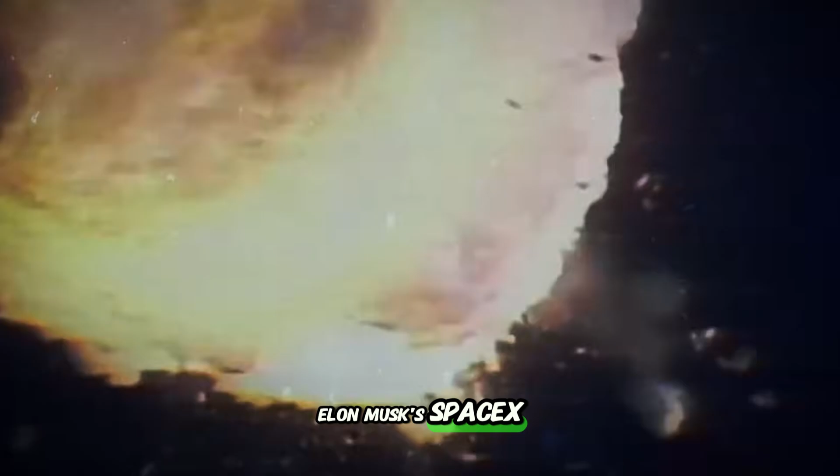What if a rocket engine could launch to orbit, land, and fly again, hundreds of times? Elon Musk's SpaceX Raptor engine is rewriting the rules of spaceflight. Join us to explore this game changer.

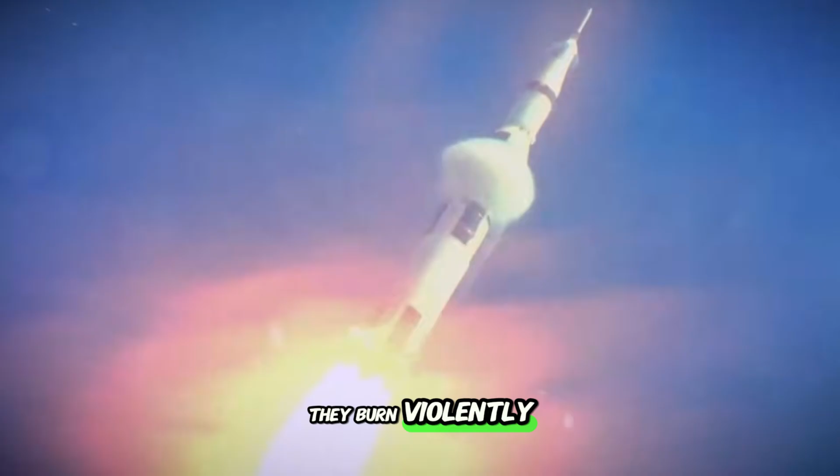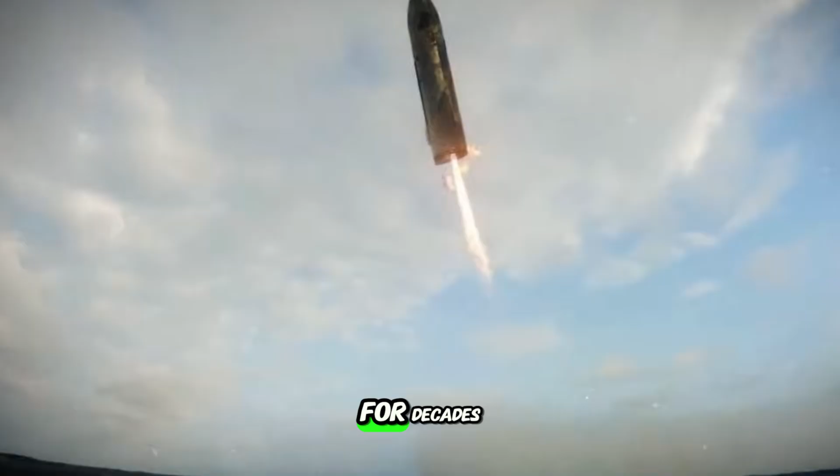Rocket engines have always been a compromise. They burn violently, waste fuel, and often destroy themselves in the process. They are machines that fight against physics tooth and nail, barely holding together long enough to do their job. For decades, this was just accepted as part of spaceflight.

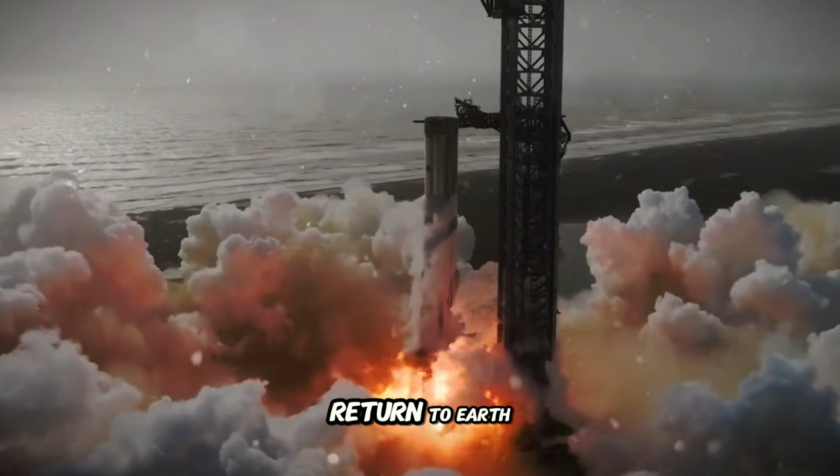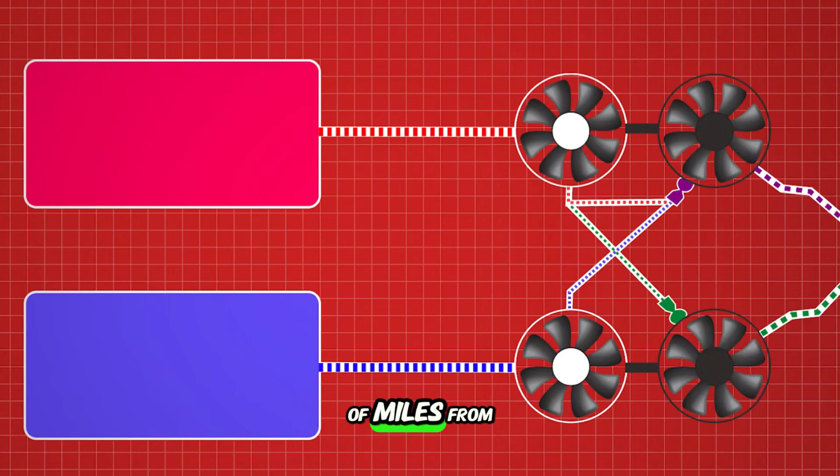But imagine a rocket engine so radically designed, so meticulously optimized, that it can launch a spacecraft to orbit, return to Earth, and do it again and again without ever needing to be repaired. Imagine that same engine powerful enough to carry a ship fully loaded across the millions of miles from Earth to Mars and then bring it back.

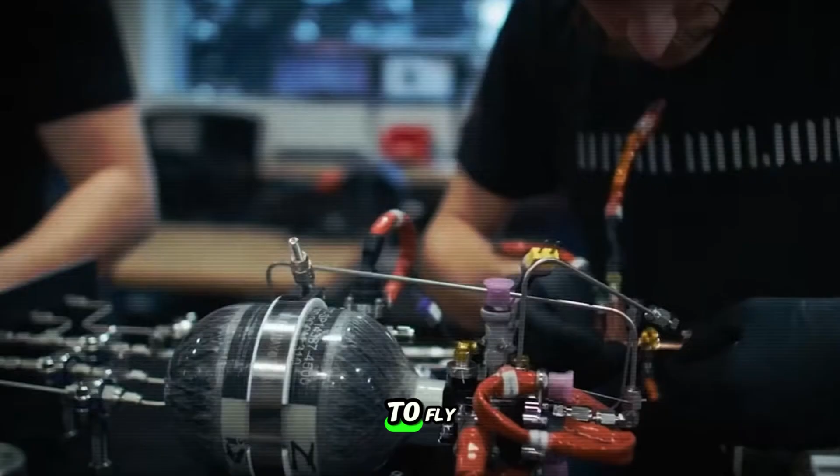That is the SpaceX Raptor engine, a piece of engineering so bold and complex that it once existed only as a theoretical endpoint, a kind of propulsion holy grail. It's the first engine in history to fly using a full-flow staged combustion cycle, a design that squeezes every possible drop of energy from its fuel and oxidizer without letting anything go to waste.

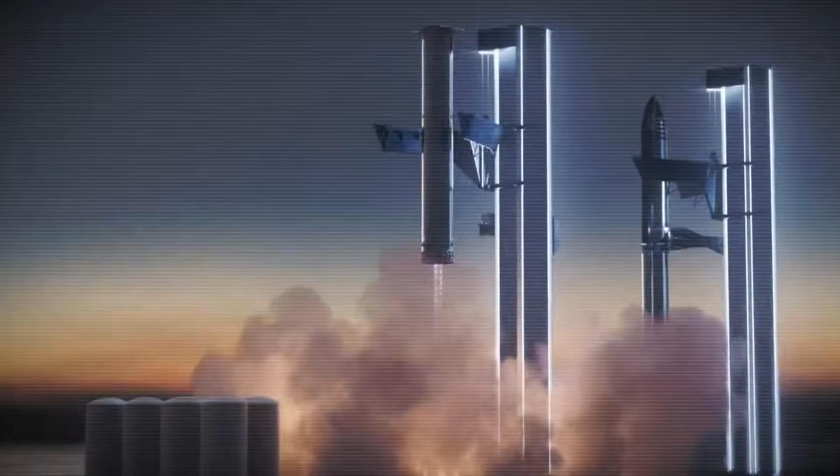For decades, the world's best engineers saw this concept as brilliant but too difficult to build. SpaceX not only built it, they are well on their way toward mass production. Raptor is made for reusability, not retirement. It's designed to take off, land, and launch again with minimal work in between, a complete shift in how we think about access to space.

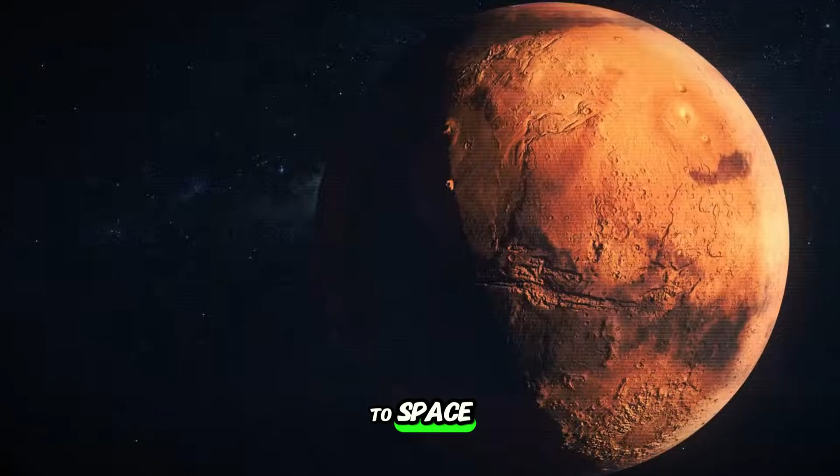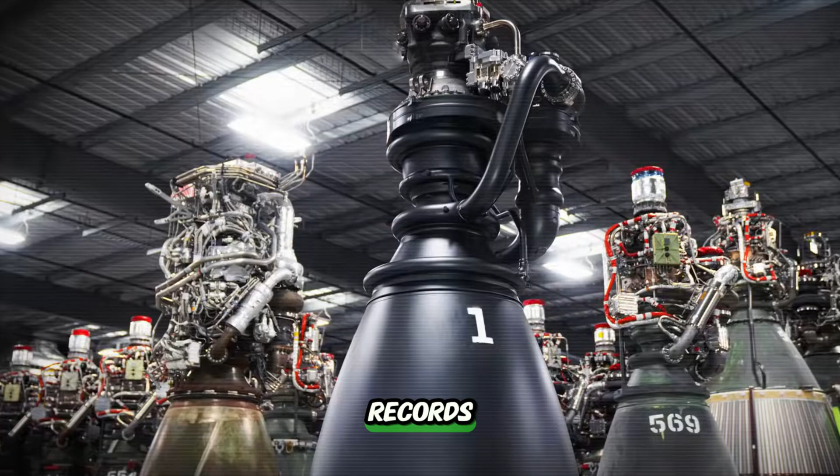And here's the twist. Raptor is methane-fueled, clean-burning, designed with Mars in mind, and tightly aligned with the goal of building a multiplanetary civilization. Stick with us, and you'll soon see why the Raptor engine doesn't just break records, it breaks the whole spaceflight industry.

No revolution begins fully formed. The Raptor engine, with all its radical innovations and record-shattering numbers, started its life as something much more humble, a question. Could there be a better way to build a rocket engine? Not just marginally better, but fundamentally different?

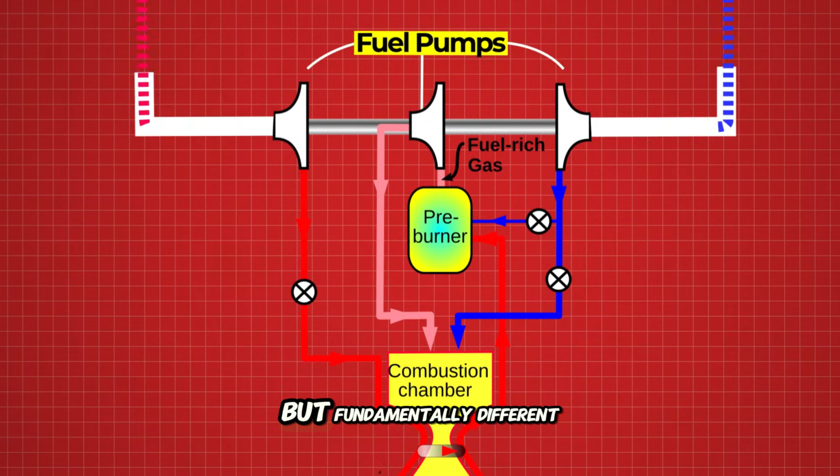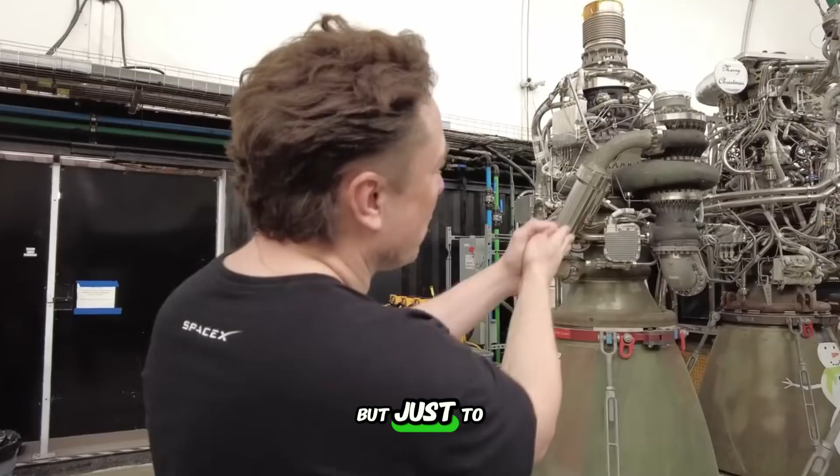That question began taking shape around 2009, when SpaceX started sketching out a high-performance engine concept built around a staged combustion cycle. In traditional rocket engine designs, some fuel is burned not to produce thrust, but just to drive the pumps that push the rest of the propellants into the combustion chamber. That turbine exhaust is then discarded, still loaded with unused energy. It's a little like lighting part of your gas tank on fire just to power your car's engine fan.

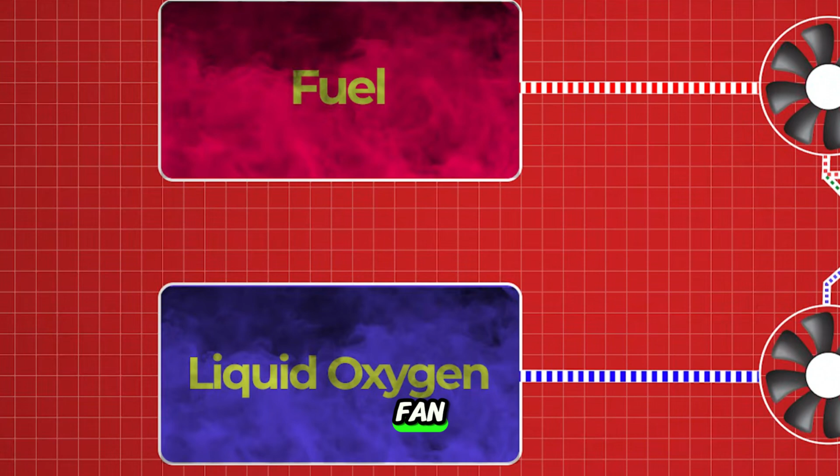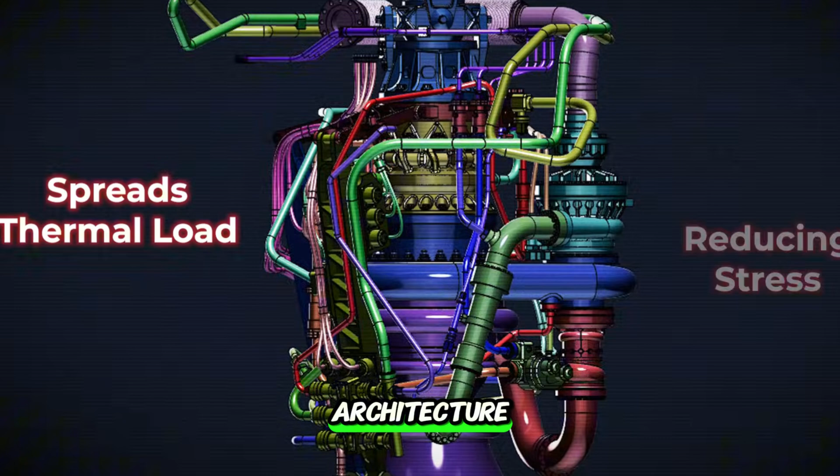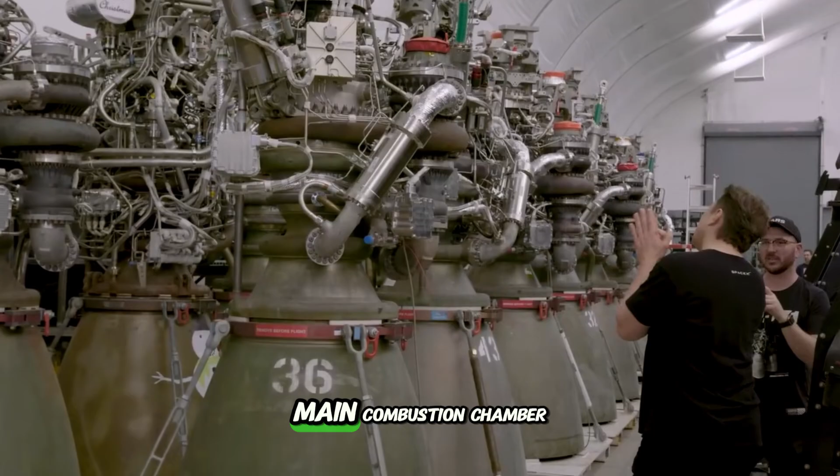The Raptor doesn't do that. It uses what's known as a full-flow staged combustion cycle, a propulsion concept so advanced that, until Raptor, it had never flown. In this architecture, both the fuel and the oxidizer are completely gasified in separate pre-burners. These superheated gases are then sent through turbines that drive the engine's pumps. Instead of being vented away, the gases are routed into the main combustion chamber, where they ignite in a final high-pressure burn.

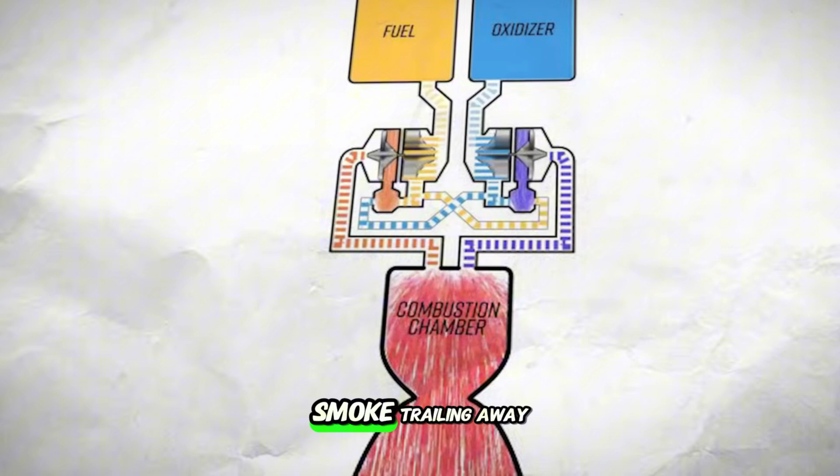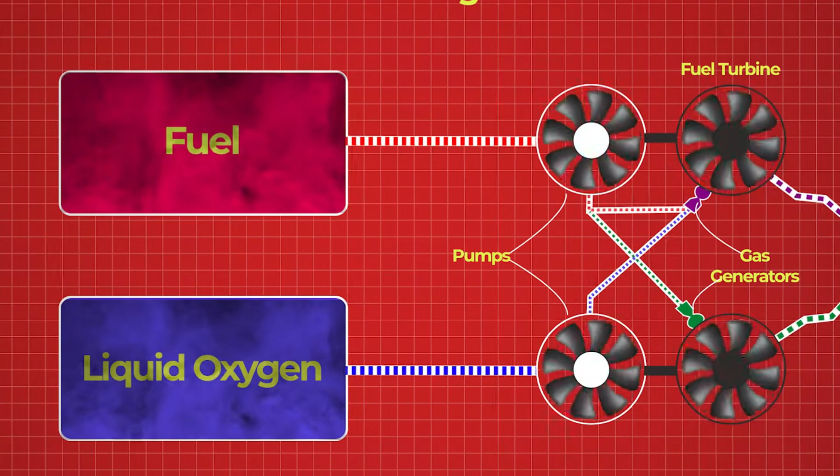Every molecule of propellant contributes to thrust. There's no waste, no dump valves, no fuel-rich smoke trailing away from the rocket. That closed-loop design makes Raptor far more efficient than open-cycle engines. It also spreads the thermal load more evenly, reducing the stress on individual components. The turbine exhaust runs cooler, which extends the engine's operational life, a crucial requirement for missions where repairs aren't an option, like landing on the moon or returning from Mars.

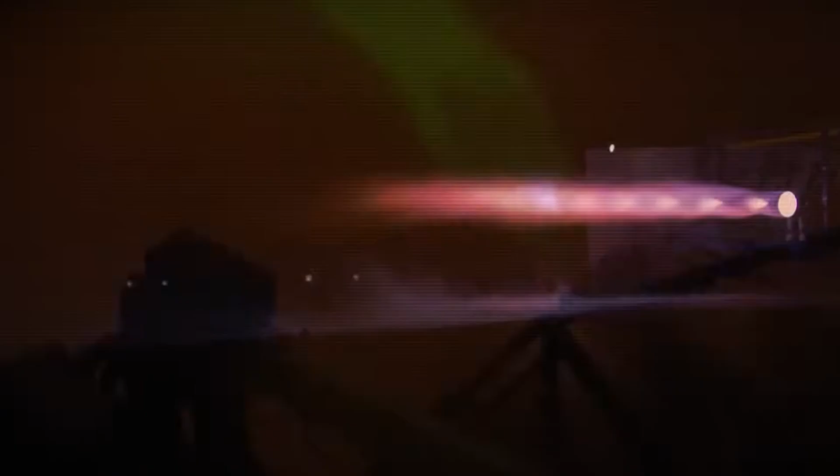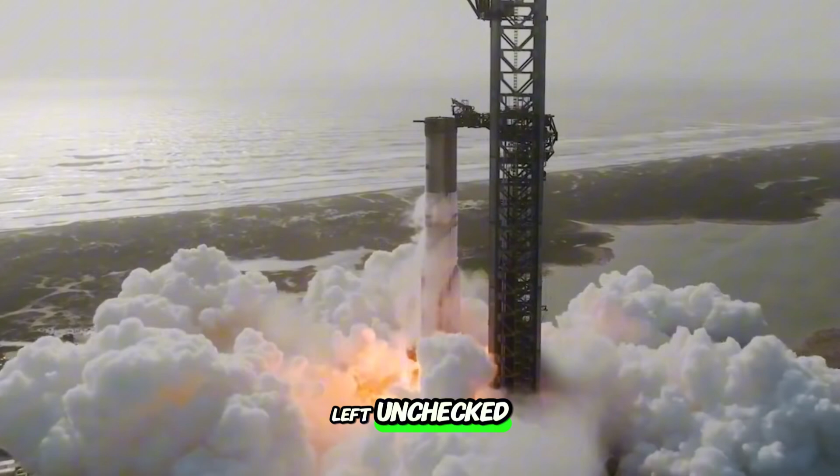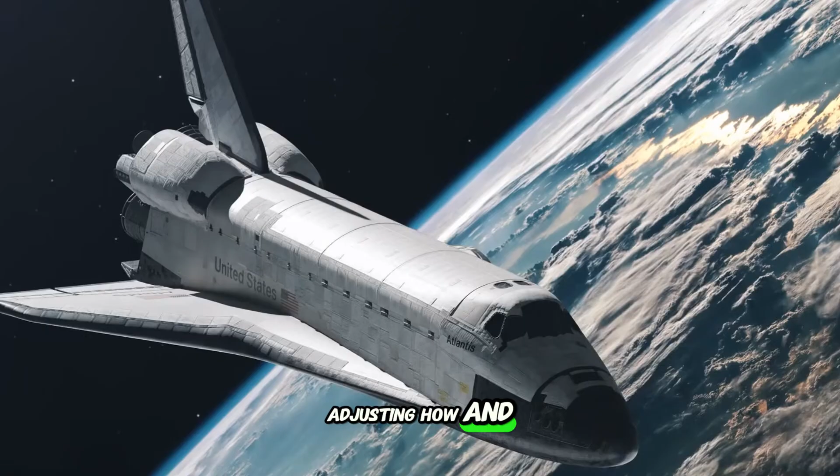But none of this came easy. Full-flow staged combustion is a beautiful idea on paper, but it's notoriously hard to build. When methane and oxygen are pre-burned at different ratios and then recombined, the system becomes incredibly sensitive to timing. Even a slight mismatch in ignition can cause combustion instability, violent oscillations that ripple through the engine like a hammer. Left unchecked, they can shatter components in milliseconds. To make Raptor viable, SpaceX had to fine-tune the ignition sequences inside the pre-burners, adjusting how and when fuel was injected to smooth out the flame and stabilize the flow.

With a design like this, fuel choice becomes critical to the engine's success.

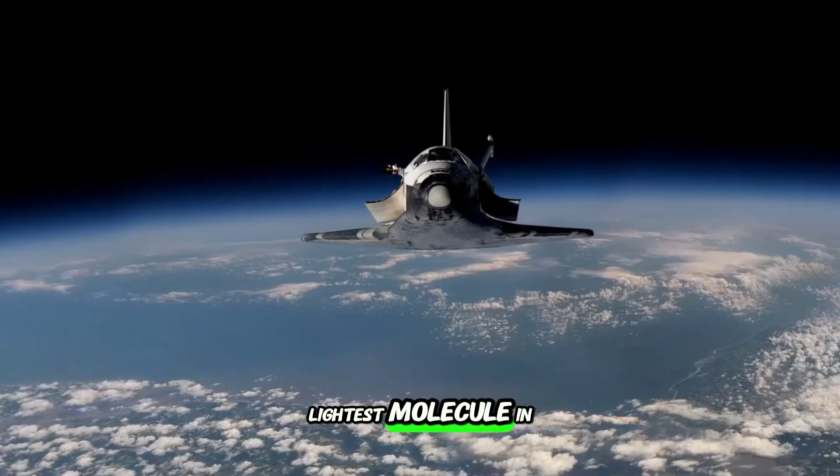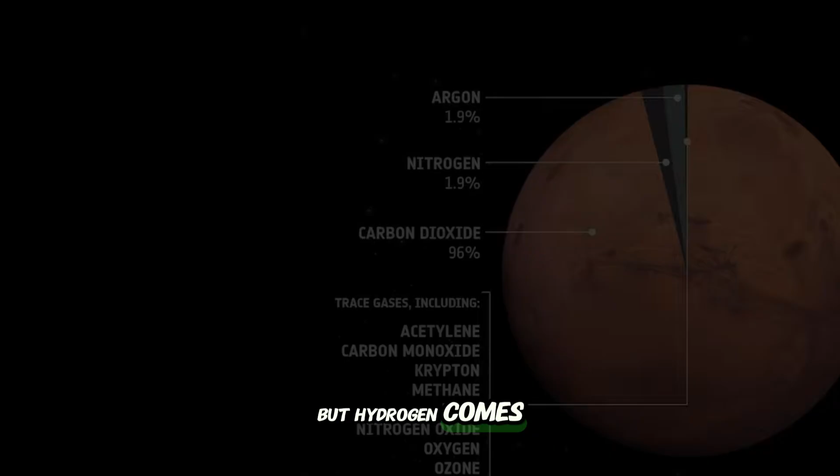At the time they began designing the first Raptor prototype, SpaceX was looking at hydrogen as the fuel of choice, which made sense. Hydrogen is the lightest molecule in the universe, and when paired with oxygen, it produces some of the highest efficiency engines ever flown, like the RS-25 on the Space Shuttle orbiter. But hydrogen comes with baggage. It's hard to store, prone to leakage, and demands cryogenic conditions so extreme that entire rocket designs have to bend around it. For a company focused on reusability and simplicity, that didn't sit well.

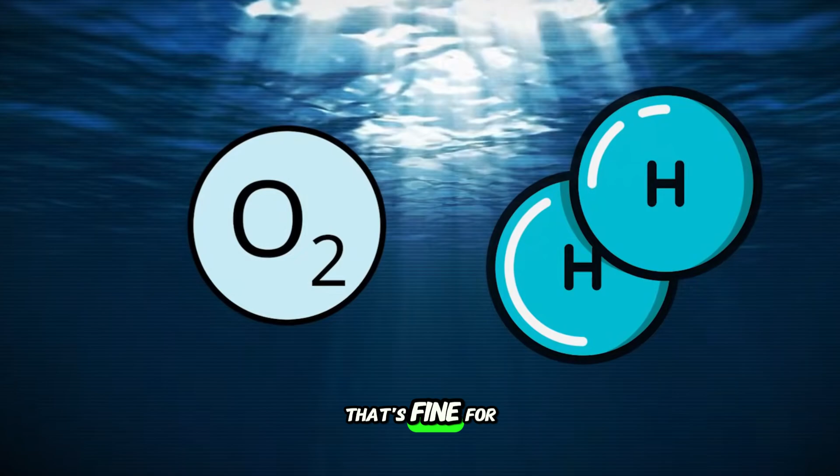By 2012, the focus shifted. Methane entered the picture, not just because it was easier, but because it made more sense. One of the biggest challenges in space exploration is that rockets have to carry all their fuel with them. That's fine for short trips to orbit, but when the destination is Mars, carrying a full round-trip fuel supply quickly becomes impractical. Methane solves this problem.

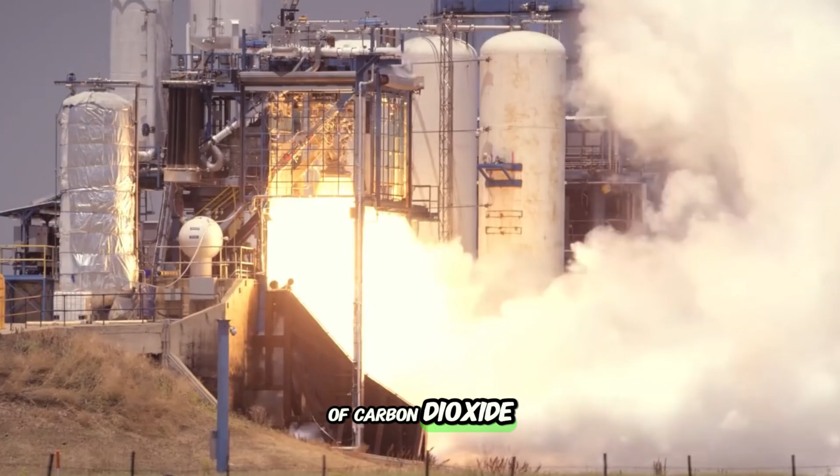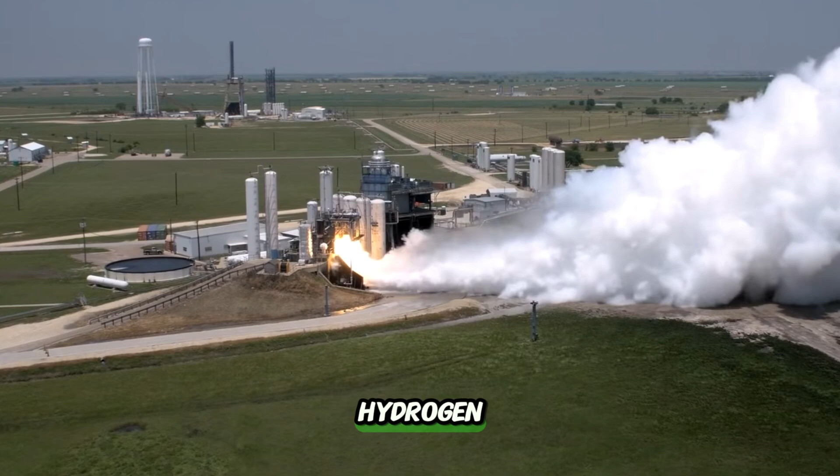The Martian atmosphere is made up almost entirely of carbon dioxide. Using a process called the Sabatier reaction, carbon dioxide can be combined with hydrogen to produce methane and water. The water can then be split into oxygen and hydrogen, creating a full fuel and oxidizer supply from local resources. This means a Starship could land on Mars, produce its own fuel, and launch back home without ever needing a resupply chain from Earth.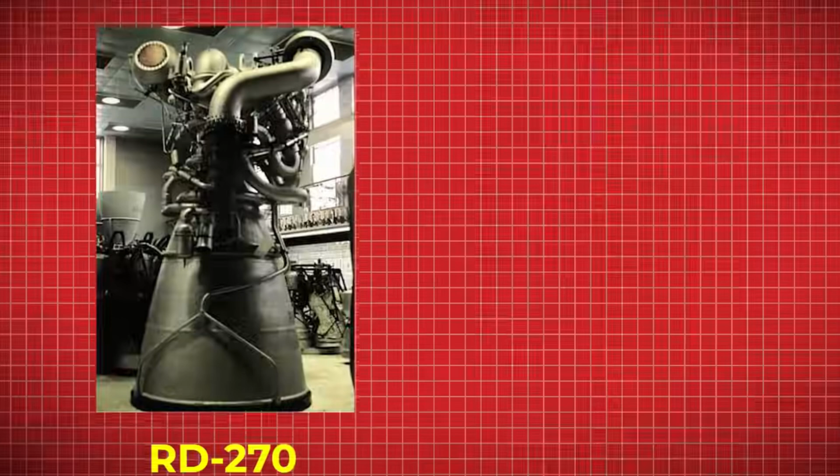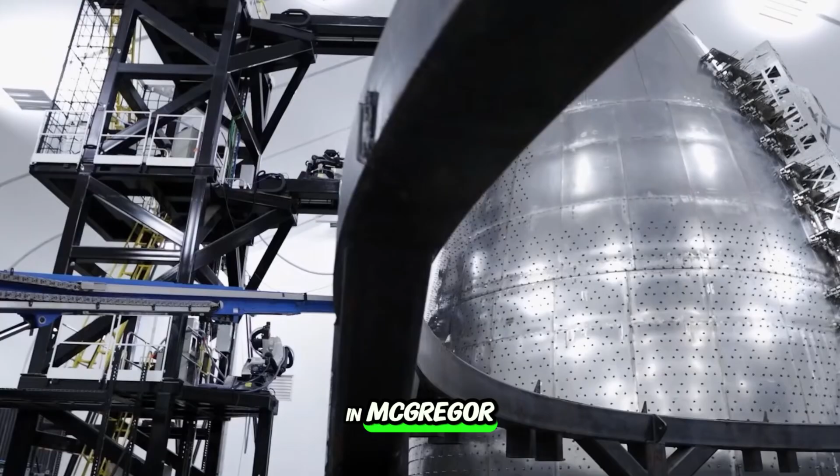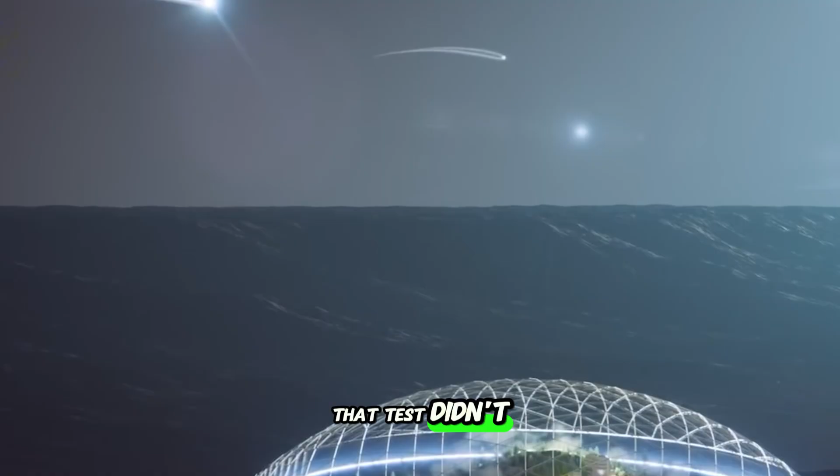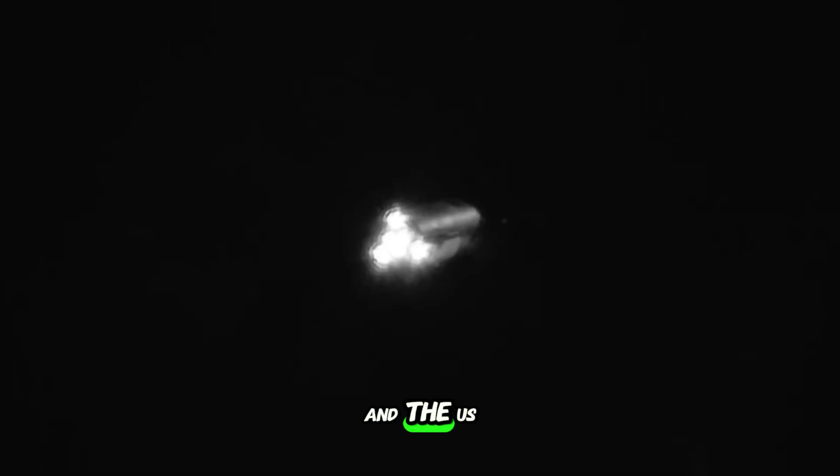3 years after development began, SpaceX was ready to bring Raptor out of theory and into the real world. In 2016, at their test facility in McGregor, Texas, they fired the first full-scale Raptor engine. It marked a historic moment, the first time a full-flow staged combustion cycle methane engine had ever been ignited. That test didn't make news headlines, but inside the aerospace community, it sent a ripple. Full-flow staged combustion had been attempted before in the Soviet RD-270 and the U.S. Integrated Powerhead Demonstrator, but neither of those engines made it off the ground.

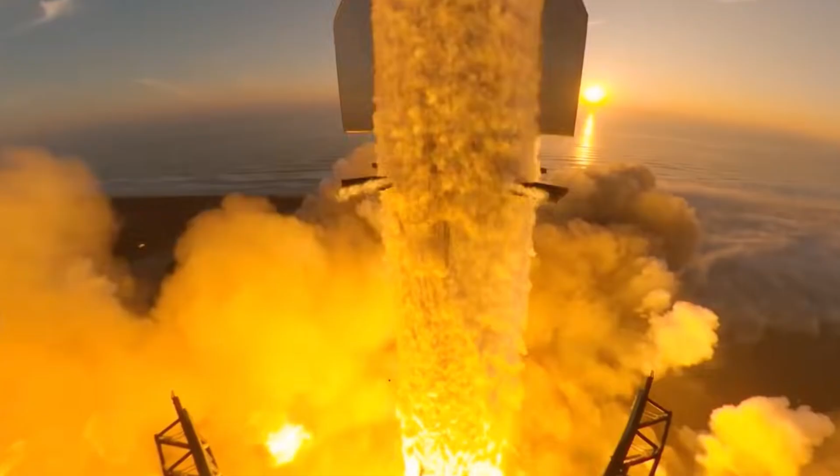From the moment it left the test stand in 2016, Raptor has been in a state of constant transformation, driven by SpaceX's philosophy of rapid iteration. Each new version hasn't just improved performance. It has reshaped the engine itself, cutting weight, increasing efficiency, and making production faster and cheaper.

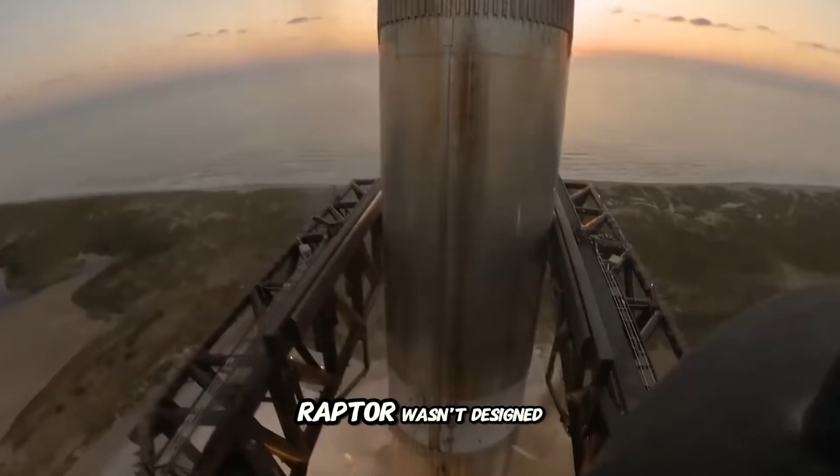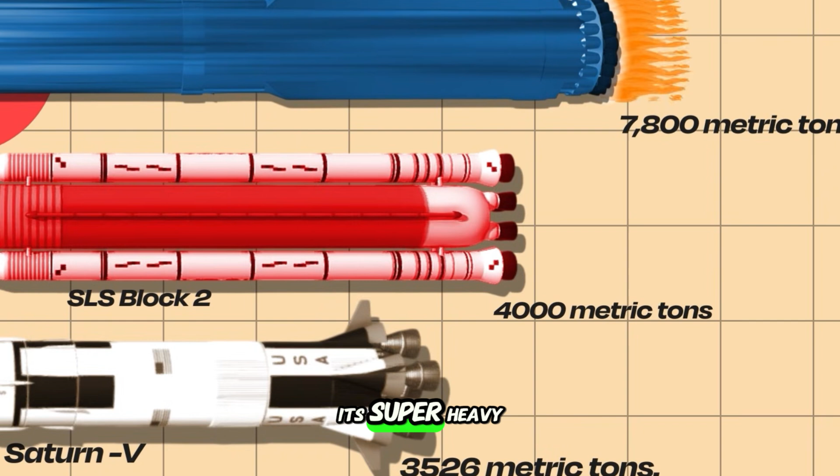Raptor wasn't designed in isolation. It was built for a specific mission, one that requires an engine capable of more than just lifting payloads into orbit. It needed to be powerful enough to launch the largest rocket ever built, efficient enough to operate in deep space, and durable enough to land and fly again, over and over. That vehicle is Starship, and together with its Super Heavy booster, it forms the foundation of SpaceX's plan to make space travel routine and interplanetary colonization possible.

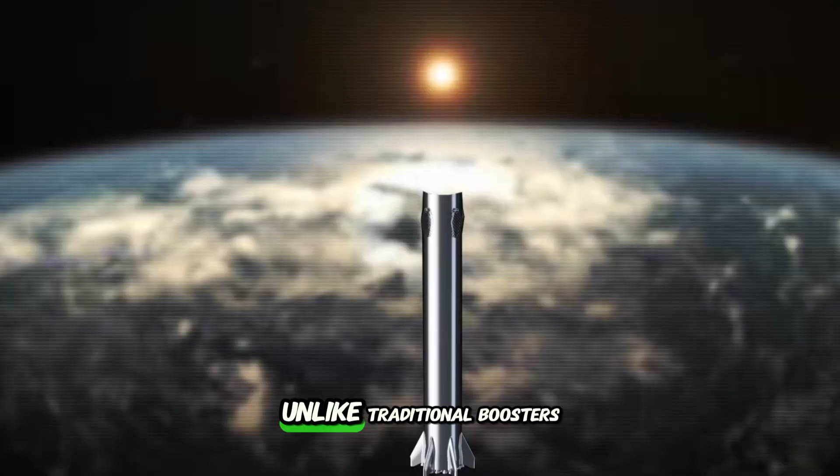At the base of SpaceX's fully reusable launch system is Super Heavy, the first stage booster that will loft Starship out of Earth's atmosphere. Unlike traditional boosters that drop away and burn up, Super Heavy is designed to return to Earth, land vertically, and be used again. But doing that at such a massive scale requires an engine with extreme power and precise controllability.

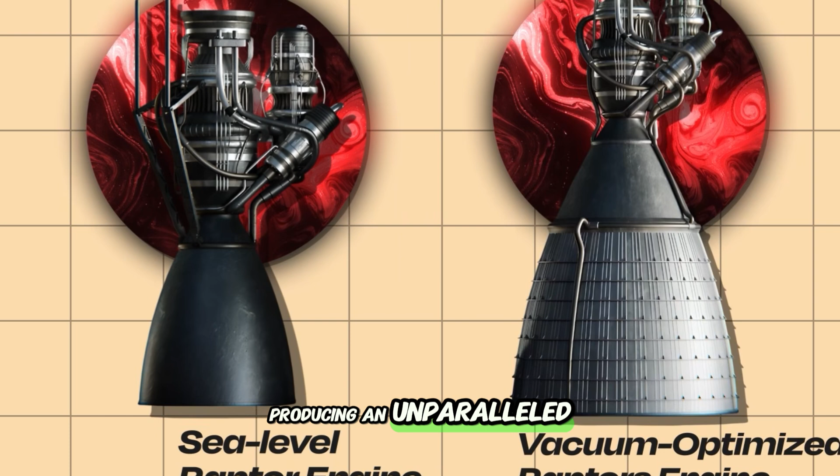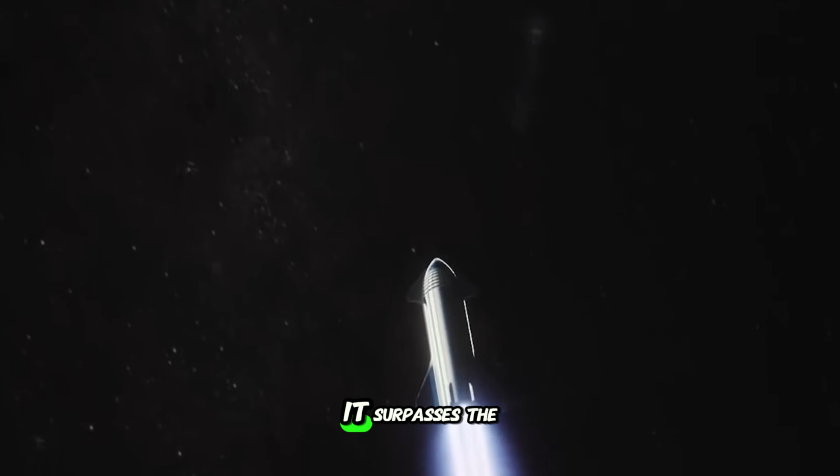Super Heavy is fitted with 33 Raptor engines, producing an unparalleled level of thrust. At full throttle, the combined force of these engines generates over 7,800 metric tons of thrust, making it the most powerful rocket booster ever built. It surpasses the Saturn V, which carried Apollo astronauts to the moon, and even dwarfs NASA's modern moon rocket, the Space Launch System, in raw power.

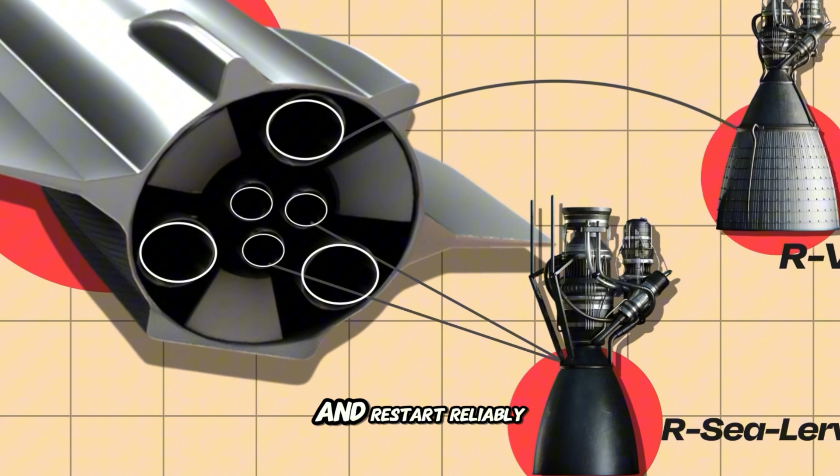That thrust isn't just about brute force. Super Heavy must also perform controlled landings, meaning Raptor's ability to throttle down to 40% power and restart reliably is just as critical as its top-end performance. Unlike engines that are used once and discarded, Raptor is built to return, refuel, and launch again with minimal downtime.

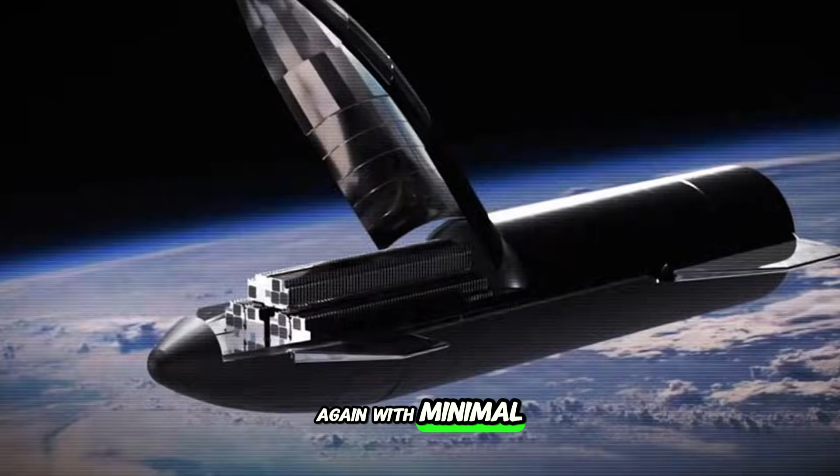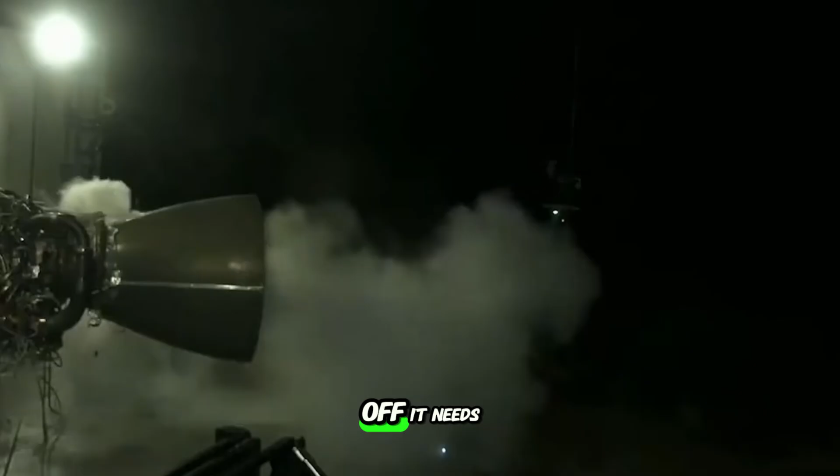Perched atop the Super Heavy booster is Starship, a vehicle designed to go far beyond low Earth orbit. While Super Heavy gets it off the ground, Starship is built to carry people and cargo to the moon, Mars, and beyond. To pull that off, it needs engines that can handle two very different environments.

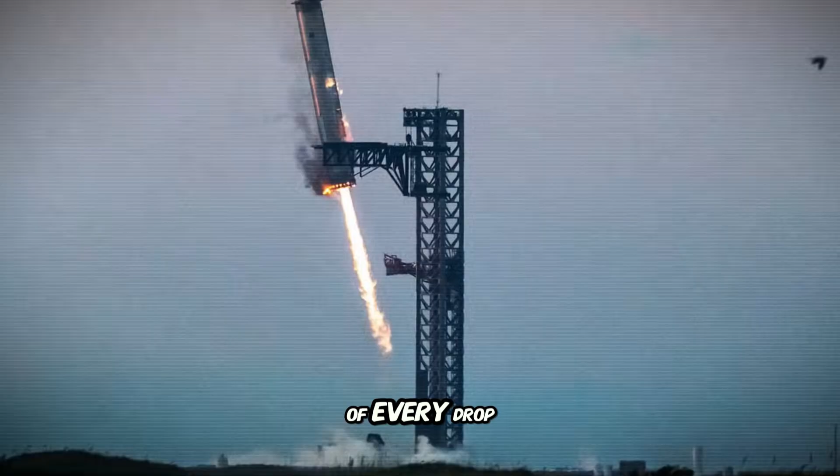For takeoff and landing, Super Heavy uses sea-level Raptors, tuned to work in the dense air near a planet's surface. But once the Starship upper stage is out in the vacuum of space, it will also utilize vacuum-optimized Raptors, or RVACs, with extra-wide nozzles specially designed to get the most out of every drop of fuel in zero atmosphere.

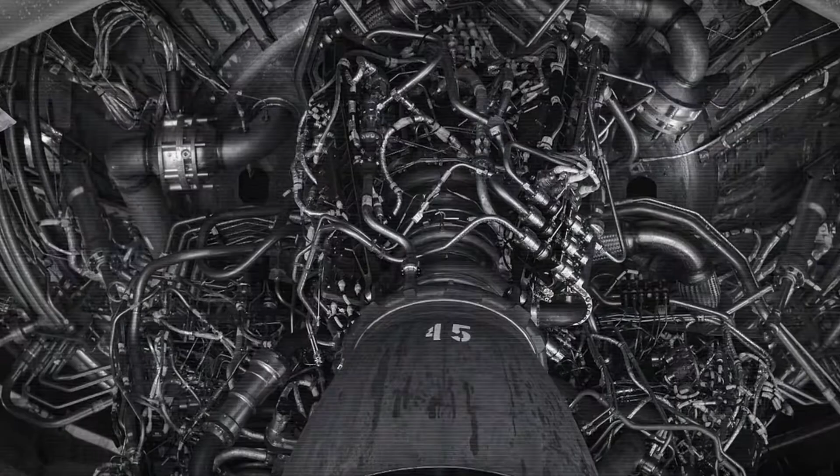Starship carries a total of 6 Raptors, 3 of the standard sea-level engines for steering and landing, plus 3 RVAC engines for maximum efficiency in the vacuum of space. That efficiency is crucial for long-duration missions, where every bit of fuel must be used as effectively as possible. It means Starship can carry heavier payloads, travel longer distances, and operate with greater flexibility in deep space.

The original Raptor, later coined Raptor 1, was an engine of firsts. It was the first full-flow staged combustion cycle engine to ever fly, and it was designed from the ground up to run on methane.

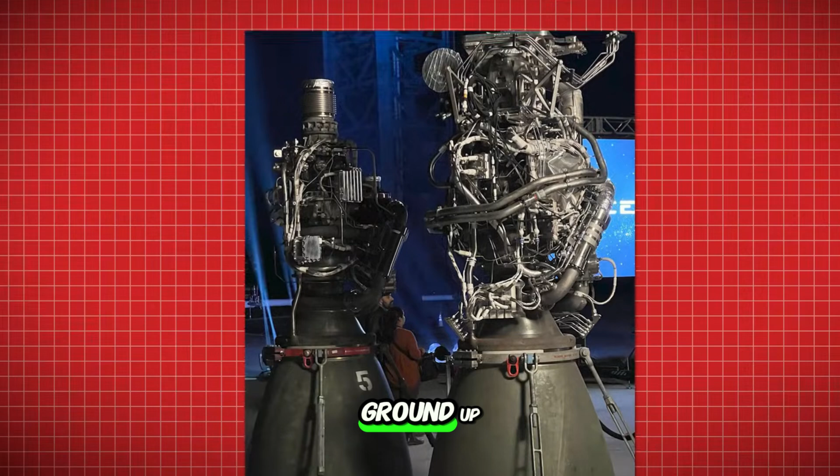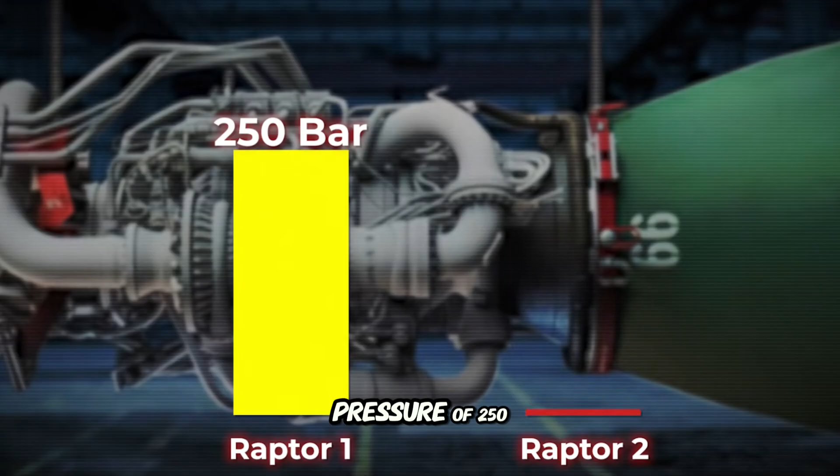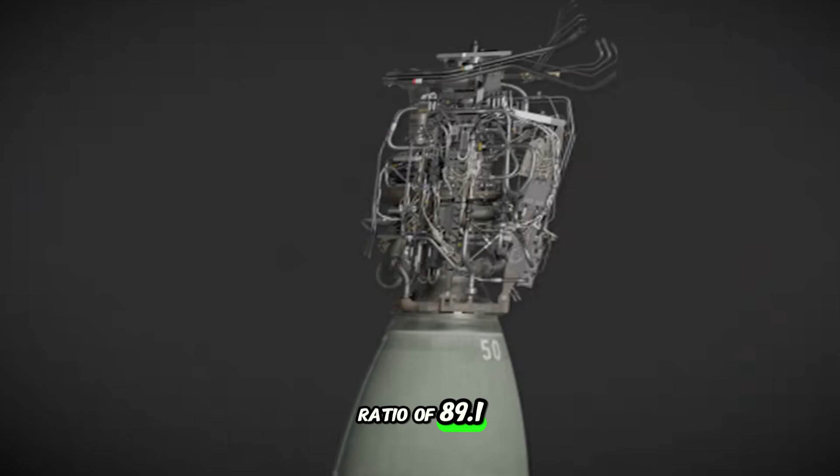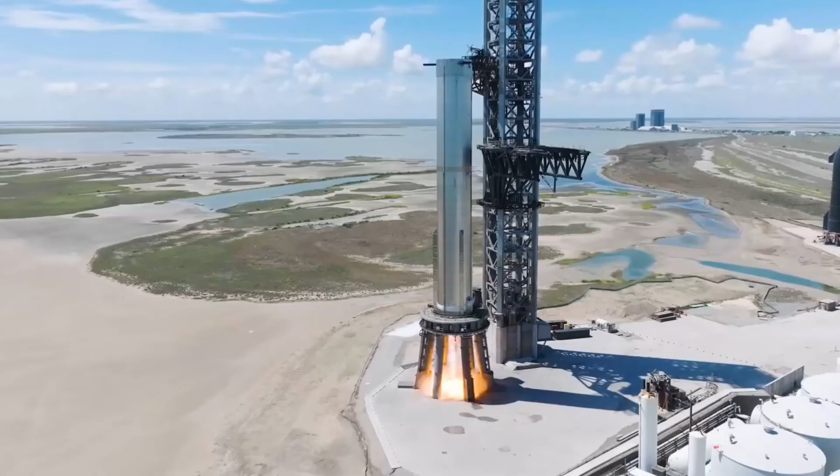Even in its early form, it was more powerful than most operational rocket engines, producing 185 metric tons of thrust with a chamber pressure of 250 bar. That pressure was already higher than anything in service at the time, but it wasn't perfect. At 2,080 kilograms, Raptor 1 was heavy, giving it a thrust-to-weight ratio of 89.1, respectable but not ideal for a fully reusable launch system. It was also complex, filled with flanges, welds, wires, hoses, and bolted joints that made manufacturing slow and expensive. SpaceX had proven the technology worked, but it wasn't yet something they could build at scale.

In 2021, SpaceX rolled out Raptor 2, a drastic departure from its predecessor. It wasn't just an improvement, it was a complete rethinking of how Raptor should be built. Every part of the engine was redesigned to be simpler, lighter, and more powerful.

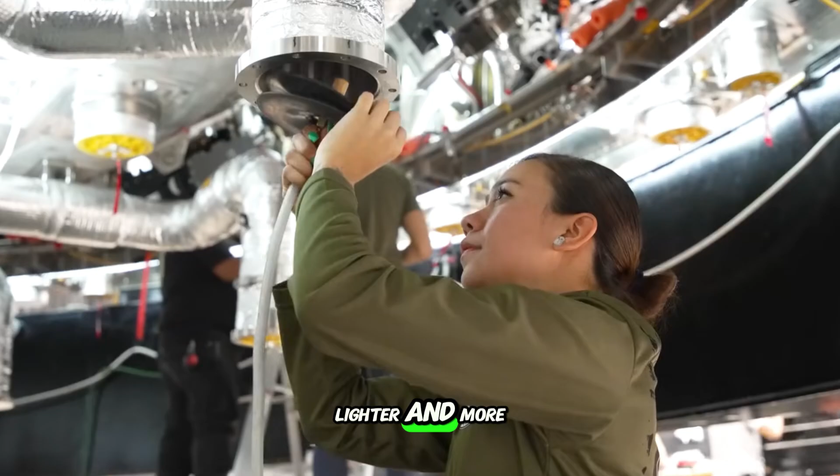The first thing to change was thrust. Raptor 2 produced 230 metric tons, a 24% increase over Raptor 1. Chamber pressure jumped to 300 bar, pushing the engine even further into record-breaking territory. At the same time, weight dropped dramatically. Raptor 2 came in at just 1,630 kg, shaving off 450 kilos from the original design. That weight saving alone made it one of the most powerful engines ever built relative to its mass.

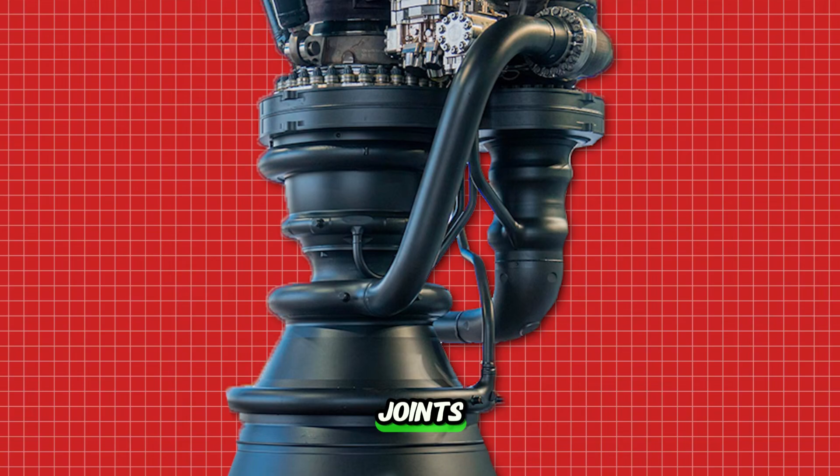And then there was the cost. SpaceX has always focused on reducing manufacturing expenses, but Raptor 2 marked a turning point. By simplifying the design, eliminating many bolted joints, reducing welds, and integrating components into larger single pieces, they slashed production costs by 50% compared to Raptor 1. For an engine that was going to power Starship, which uses up to 39 Raptors per launch, this wasn't just an improvement, it was the only way to make SpaceX's long-term vision financially viable.

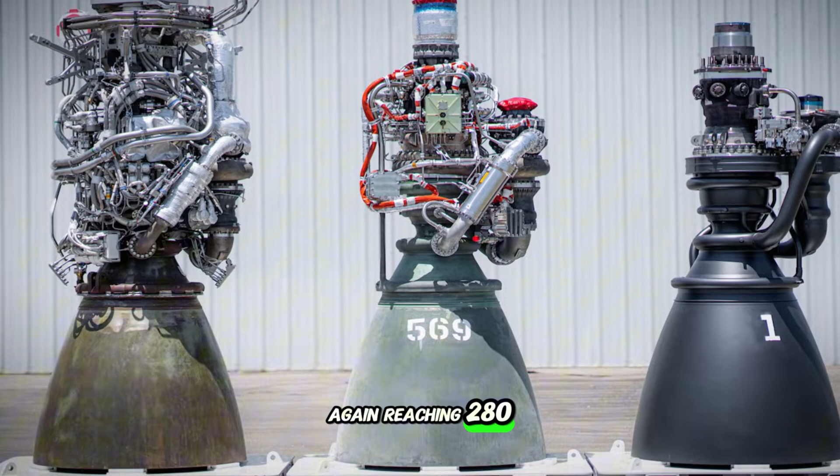By 2024, SpaceX had taken everything they learned from Raptor 2 and pushed it even further with a new prototype engine, Raptor 3. Thrust climbed once again, reaching 280 metric tons, a 22% increase over Raptor 2. Chamber pressure soared to 350 bar, shattering all previous records. No other operational rocket engine has ever reached such high pressure.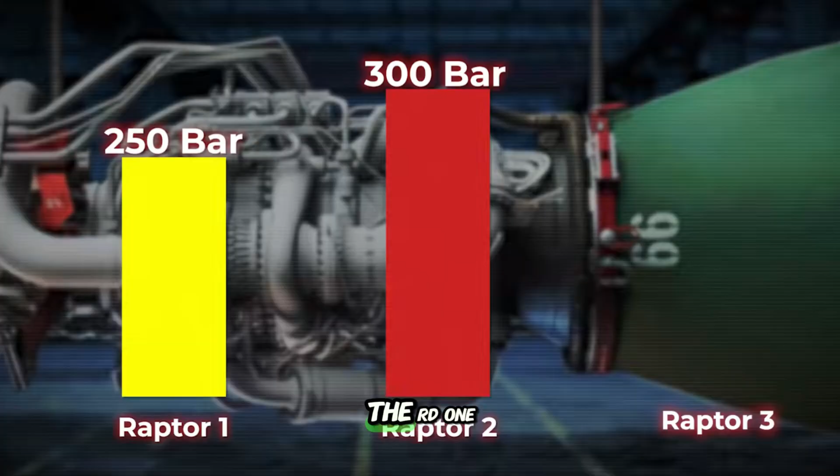Weight continued to drop. Raptor 3 came in at just 1,525 kilograms, bringing its thrust-to-weight ratio far ahead of competitors like the Blue Origin BE-4 or the long-standing Russian workhorse, the RD-180, and making it one of the most efficient engines ever built. One of the most groundbreaking improvements was in cooling and durability.

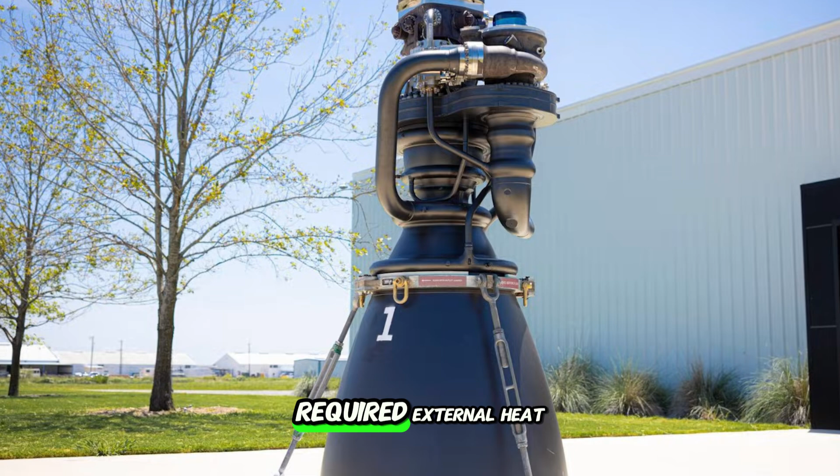Early Raptor versions required external heat shielding to protect the engine's plumbing and components. Raptor 3 integrated cooling channels directly into the structure, eliminating the need for extra shielding while also reducing mass and complexity. The result was a leaner, tougher, and more powerful engine, one that could be produced faster, cheaper, and at a scale never before seen in rocketry.

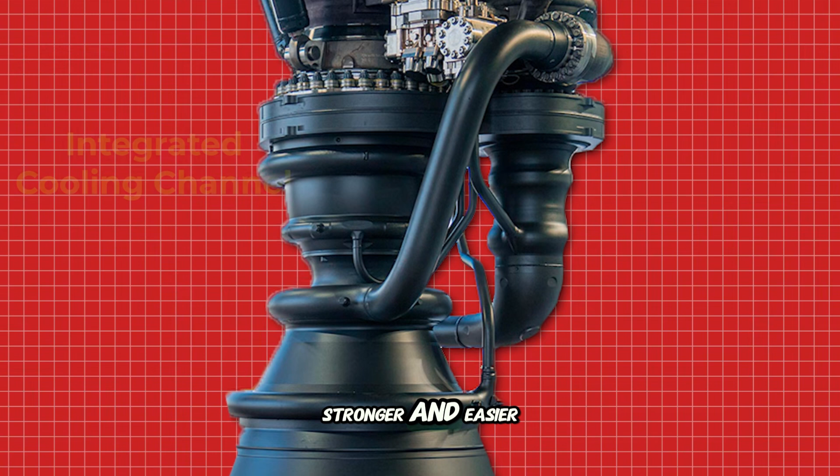And if history is any guide, Raptor 3 won't be the last iteration. With each new version, SpaceX has made the engine lighter, stronger, and easier to build, and they're not done yet. The company is already working on an even cheaper and more powerful design, setting the stage for an era where Starship launches are as routine as commercial flights.